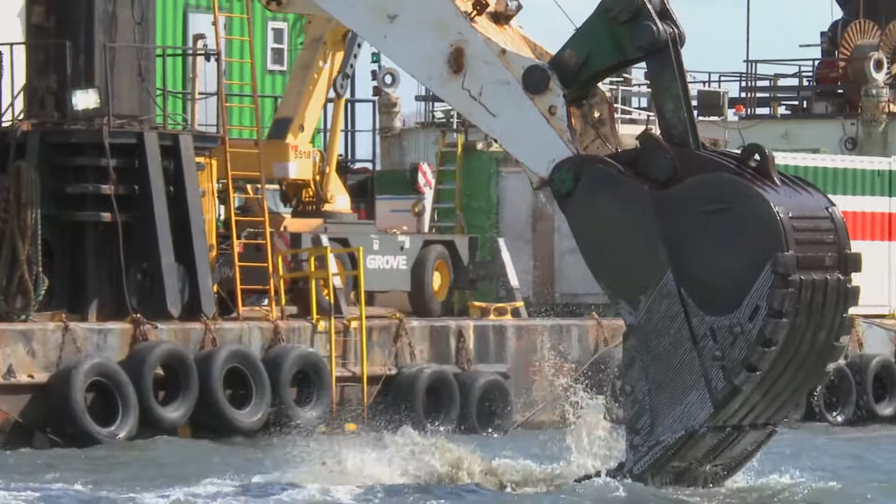On Sunday, March 3rd, 2013, at 3:30 p.m., South Essex Sewerage District Director Alan Taubert gets a phone call that no one wants to receive. I got a phone call from Amy McHugh, Superintendent of Water and Sewer in Marblehead, who told me that there were seagulls in the harbor hanging around in one particular spot. I knew immediately that there was something seriously wrong out in the harbor that day.

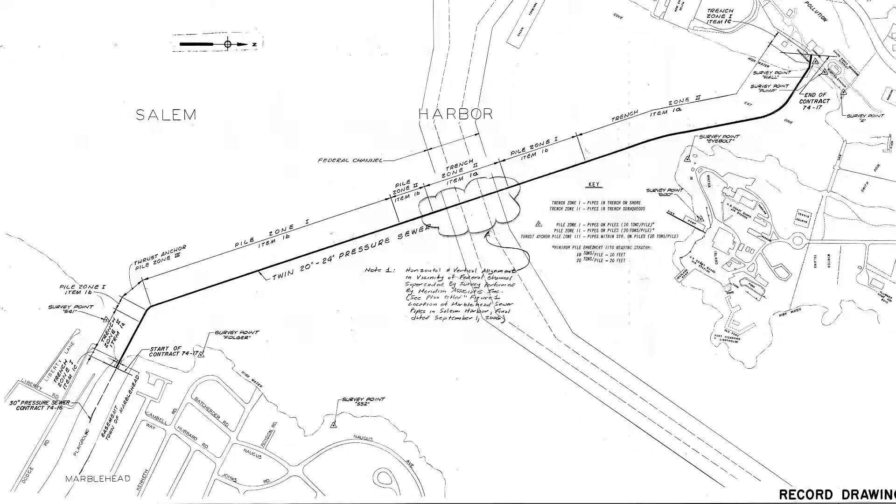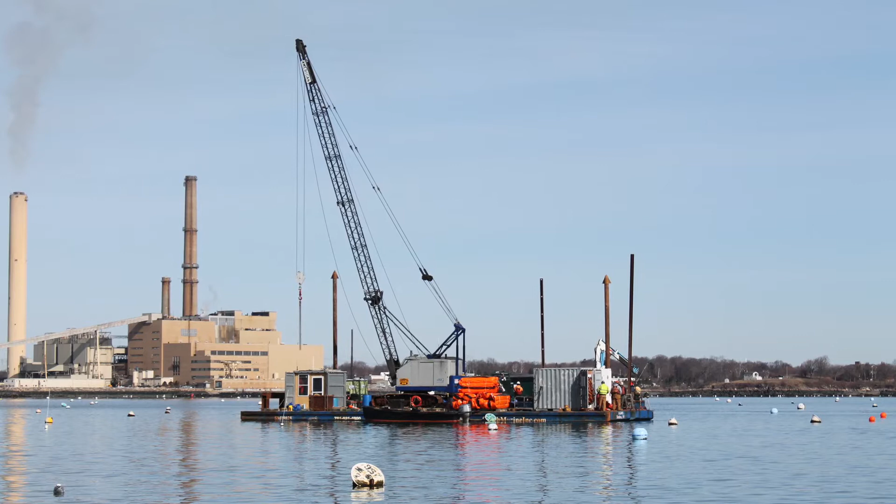The district suspected a leak in one of the twin pipes that delivered sewage from the Town of Marblehead to the South Essex Sewerage District for treatment. Unfortunately, this belief was correct. Divers from J.F. White Contracting found a broken section of pipe a few hundred feet off the Marblehead shore and performed an emergency repair using pipe the district had on hand for this purpose.

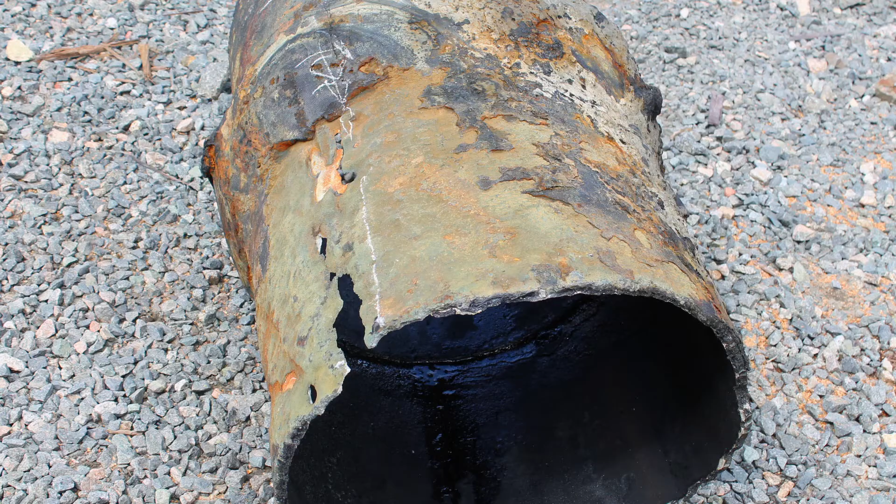This is a section of the pipe that came out where the original leak was found, right here. So when we excavated down the first day, this is where the hole was. But this is the piece of pipe that came out that was replaced. Realizing the magnitude of the threat that further leaks could develop, the sewerage district acted immediately to hire a design team to thoroughly evaluate the pipeline. This confirmed that the pipes were in urgent need of replacement.

I'm Rachel Burkhart, and I'm the project manager with Parsons Brinckerhoff, and we were brought on board by the district here after they discovered the leak that was on the Marblehead end of the force mains that go from Marblehead over to Salem, to assess whether or not that leak was unique to that section of the pipe or what was the condition of the rest of the pipe.

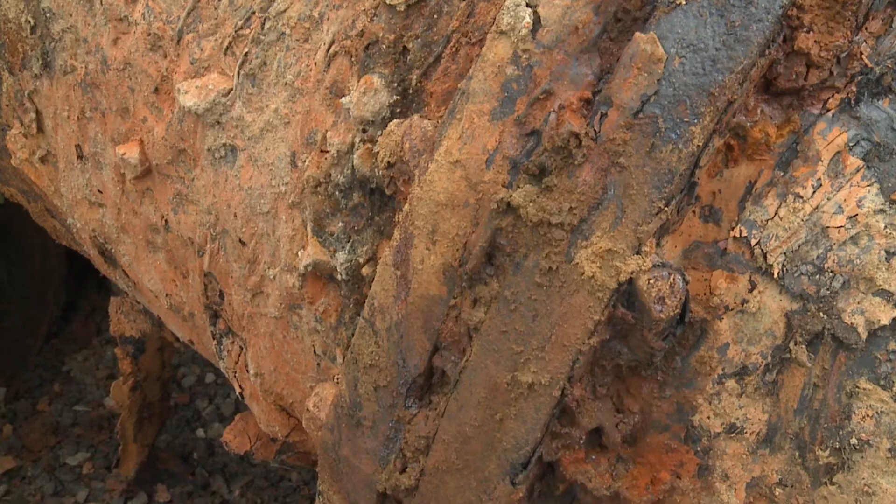So our early work was to send in divers and find out what the condition was, do some non-destructive testing, and the conclusions of that phase were that the pipe indeed was corroded severely in several locations, and that particular leak could happen at any point in time on other parts of the pipeline. So our recommendation after that point was to replace the entire pipeline from one shore to the other.

As well as contending with the modern-day boating and recreational activities, working in this historic harbor presented special challenges. Native Americans used this location as a place for hunting and fishing, and state officials and local tribes believed it might be possible to find evidence of their ancestors' habitation in soils buried deep in the sediment below the harbor floor.

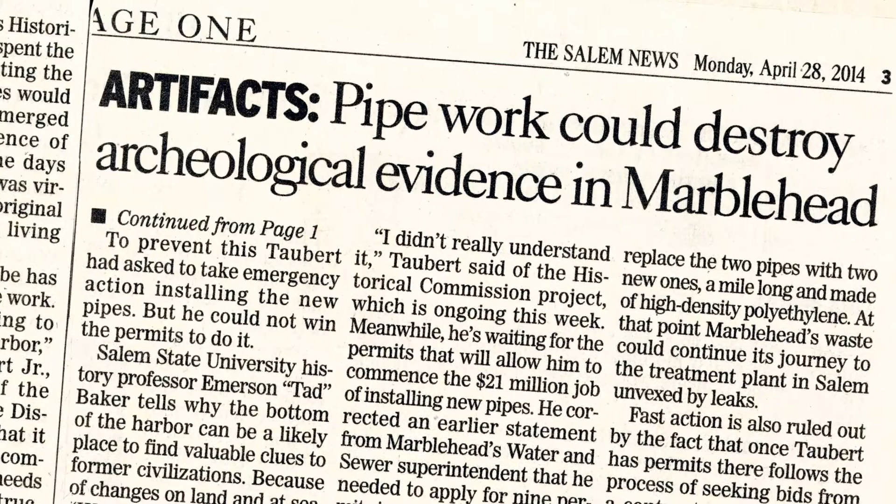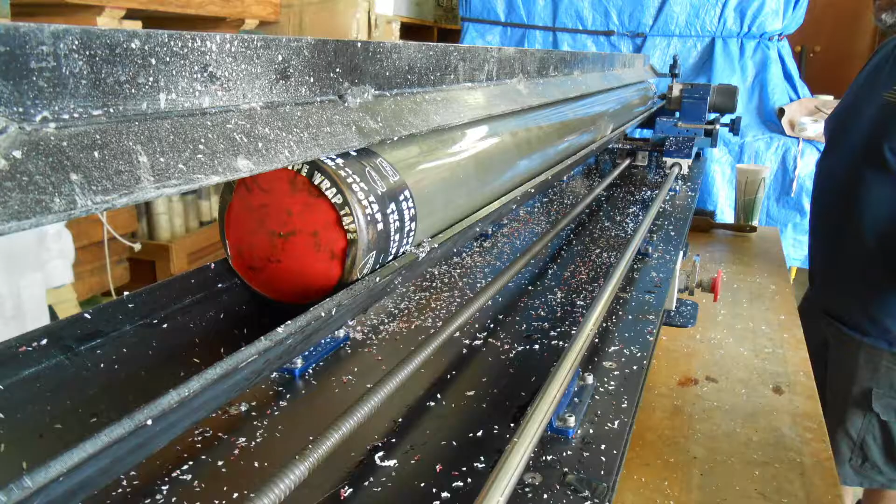To address these concerns, the design team used a VibraCore sampler to collect a series of deep sediment samples. We had to do a series of VibraCores and then take those samples down to a laboratory at the University of Rhode Island, where an underwater archaeologist and his team examined them in great detail and analyzed whether or not they would have any findings. So we ended up doing 2 rounds of that.

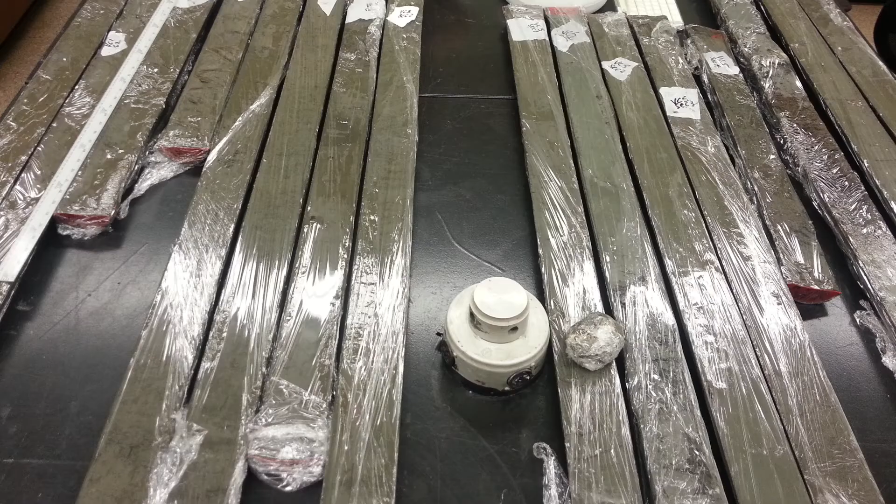The first round was just along the length of it to see if we saw anything of interest, and then we found one where there might have been some potential paleosols, which was in a layer where it was a salt marsh that existed 7,000 years ago. It now is about 10-20 feet into the muck, but that's where the sea levels were at that particular time.

Eventually, after a long, lengthy process, because this was only one of about 5 permits we needed to get, we finally got the permits and got into the construction phase of the project. With project permits and approvals in hand, the district was able to proceed with the bidding of a construction contract to install new pipelines beneath the harbor. At an initial contract value of $9.4 million, contractor Caldwell Marine mobilized into Salem, Massachusetts in mid-January 2015.

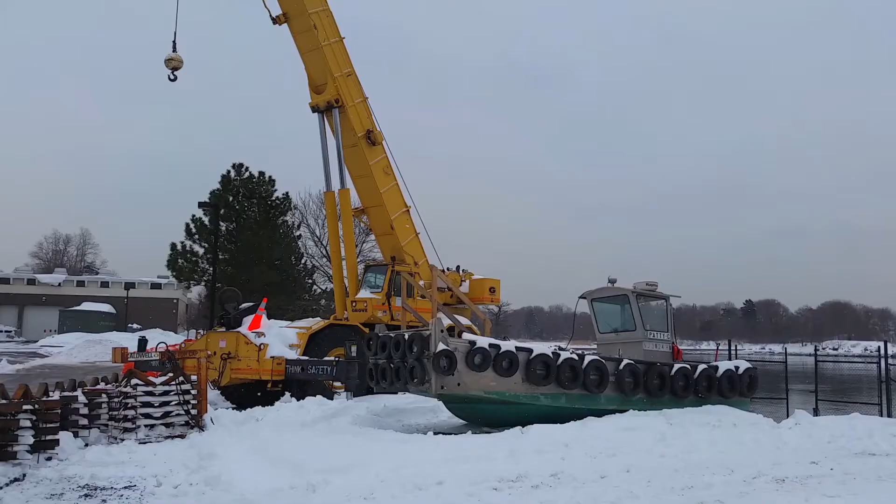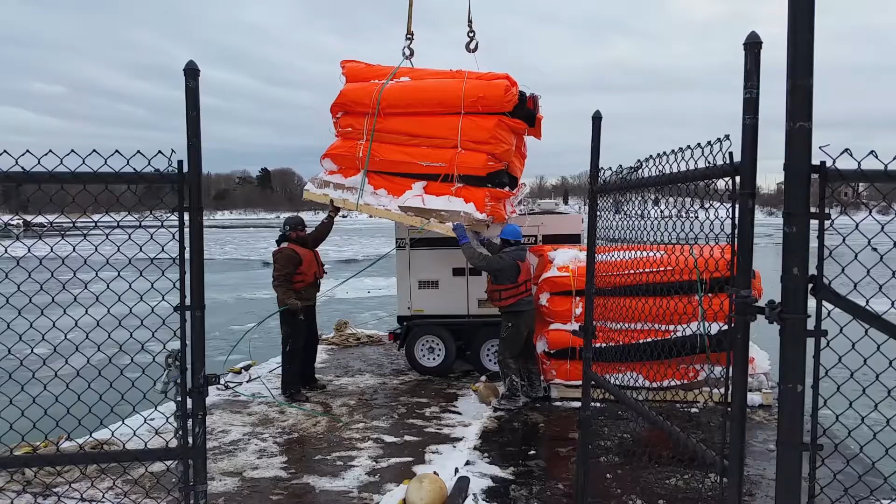As the contractor made initial site preparations, winter geared up for a record-breaking season, officially making the winter of 2014-2015 the all-time snowiest in the Boston area. Even with all the snow, Caldwell continued to assemble their equipment and materials while they maneuvered workboats and barges into Salem Harbor.

Because sanitary waste is continuously being flushed and drained into Marblehead's sewer system, there was no effective way to stop the flow during construction of the new pipeline. For this reason, the pipeline construction was carefully phased to ensure that sanitary sewage could continue to flow from Marblehead to the South Essex Sewerage District's treatment plant without any loss of service.

During the first phase, the pipelines were installed across the Federal Navigation Channel, the deepest part of the harbor. Special flanges were fabricated at each end to allow for future phases of the pipeline to be bolted on.

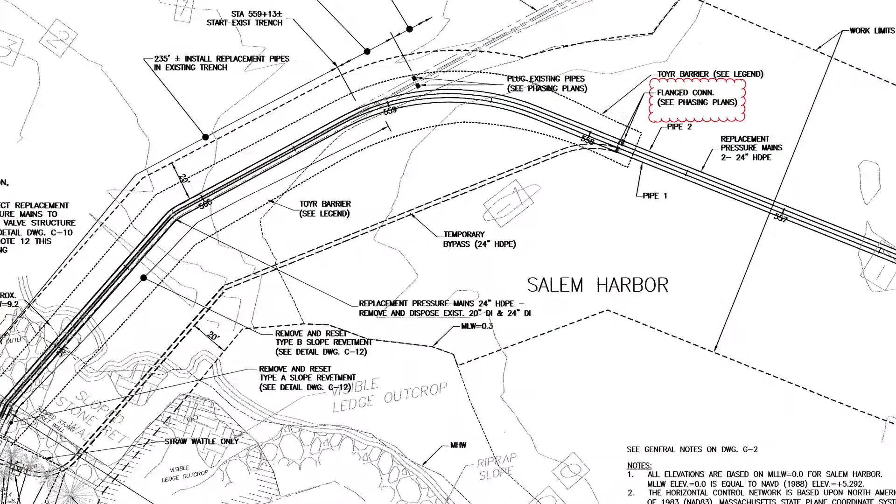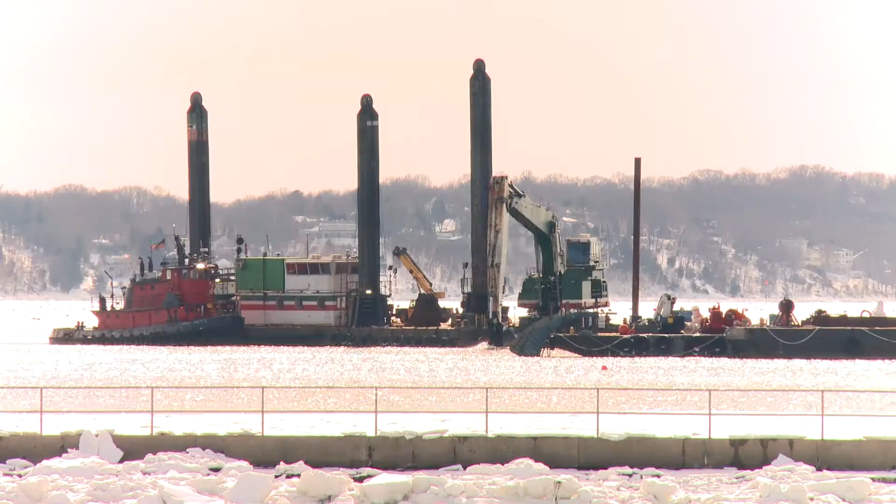This phase required a trench to be dug to place the new pipes, while the old pipes remained in service, carrying wastewater out of the town of Marblehead. In order to accomplish that goal, Caldwell Marine subcontracted with J. Cashman Incorporated, which brought in the Captain A.J. Fournier excavator dredge barge. This dredge barge excavated the majority of the trench through the winter and spring.

The trench was located parallel to the existing pipelines, but far enough from them to avoid the risk of damage. When the trench was complete, the new pipes were installed, at a depth great enough to provide a minimum of 5 to 6 feet of cover over the top of the pipes. The trenching and offshore pipe installation were the pivotal first steps to prepare for all future phases of the job.

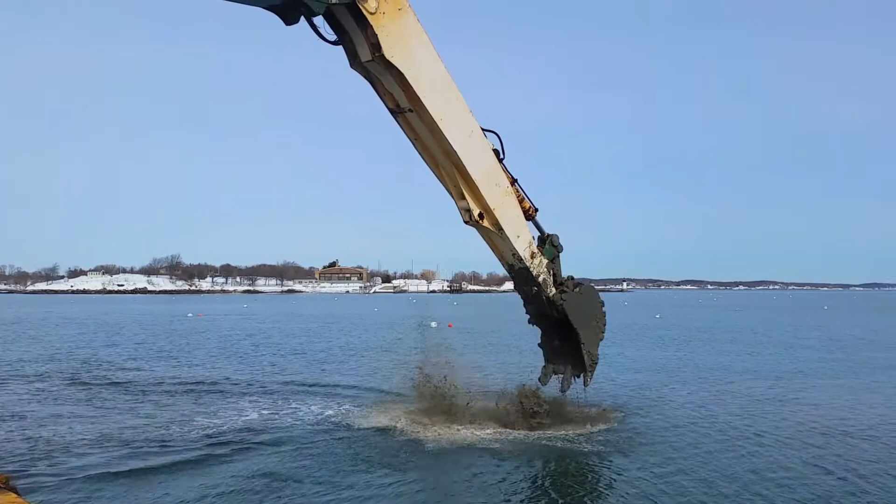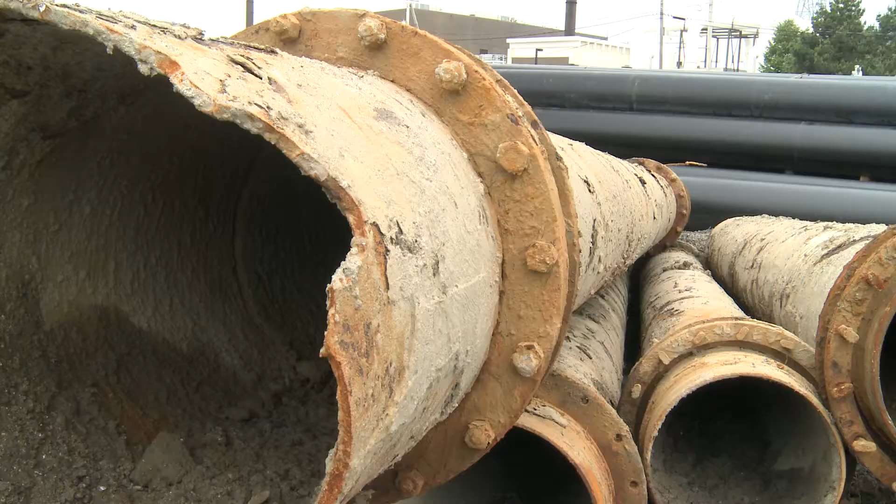The existing ductile iron pipelines were installed in the mid-1970s as part of the 74-17 Marblehead Force Main and Pressure Sewer project. With these pipes failing in less than 40 years, the district and design team worked to select new materials that would provide superior long-term performance. This piece here is a section of the new pipe that just got installed. This is a high-density polyethylene SDR11. It's basically a garbage bag. This is 2 inches thick.

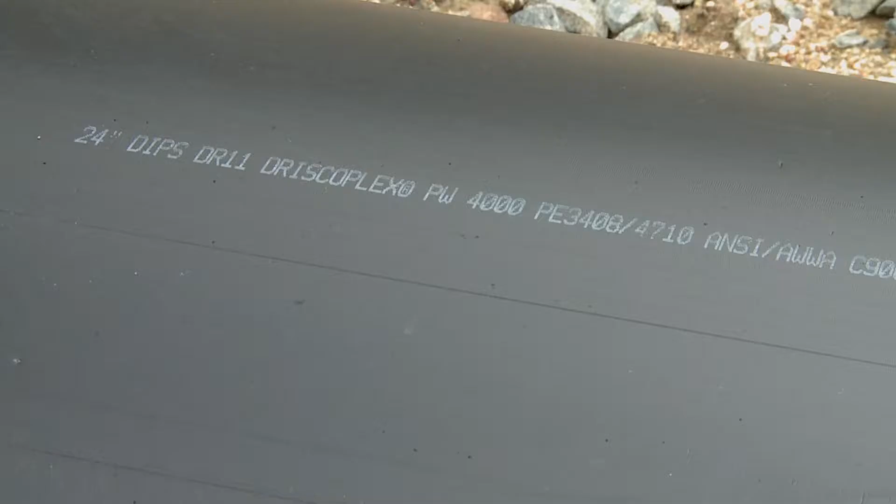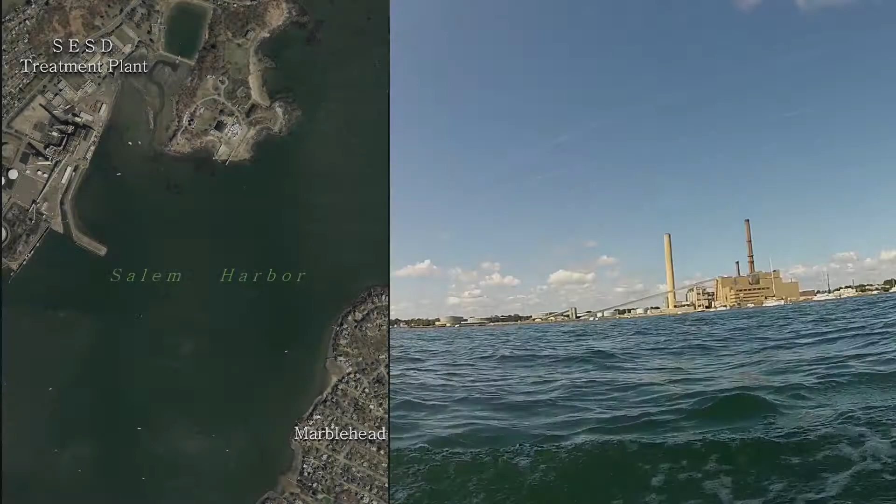Using the HDPE pipe material, along with bolts and flange backing rings made of C276 Hastelloy steel, one of the most corrosion-resistant alloys available, the design team hopes to achieve the goal of providing a 100-year service life. Raw sewage from the town of Marblehead travels over 6,000 feet to the treatment plant in Salem. To create pipelines of this length, a pipeline assembly area was established on the Salem side of the job.

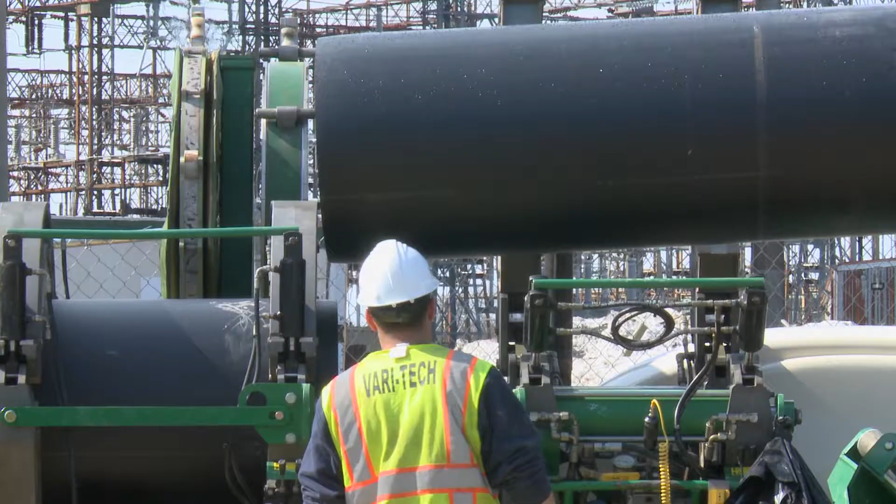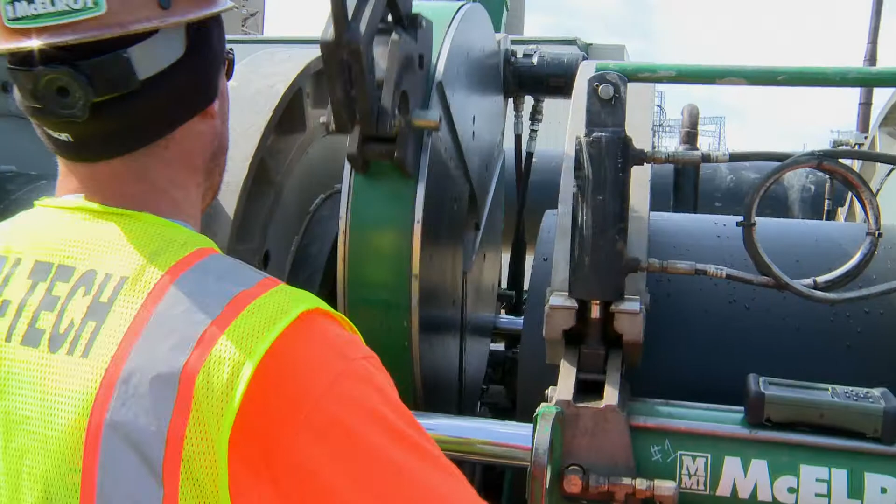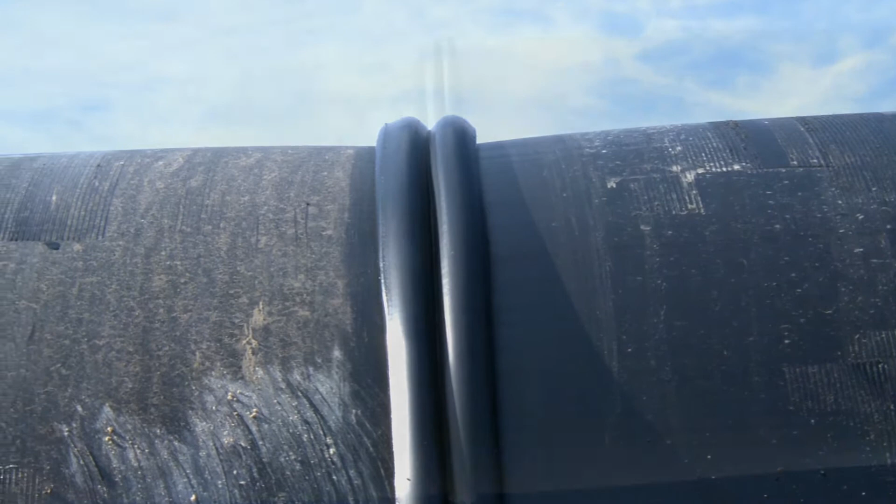Sections of the new pipe are fused together using 2 McElroy fusion welding machines. These machines plane the pipe ends to ensure a square fit. A plate then applies heat at 400 degrees Fahrenheit for around 15 minutes. When ready, the machine presses the 2 pipes together, applying 425 pounds per square inch of force. Once the proper weld bead is formed, the pipe is allowed to cool for 30 minutes. This creates a fused joint that is stronger than the pipe itself.

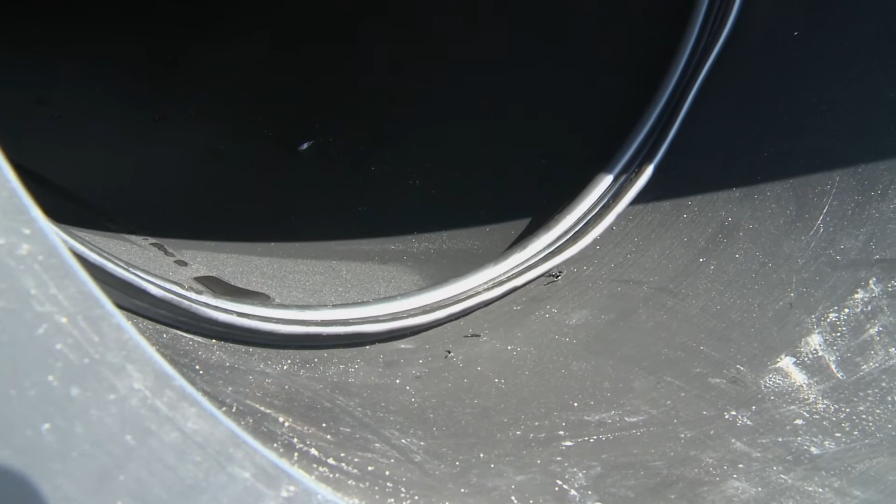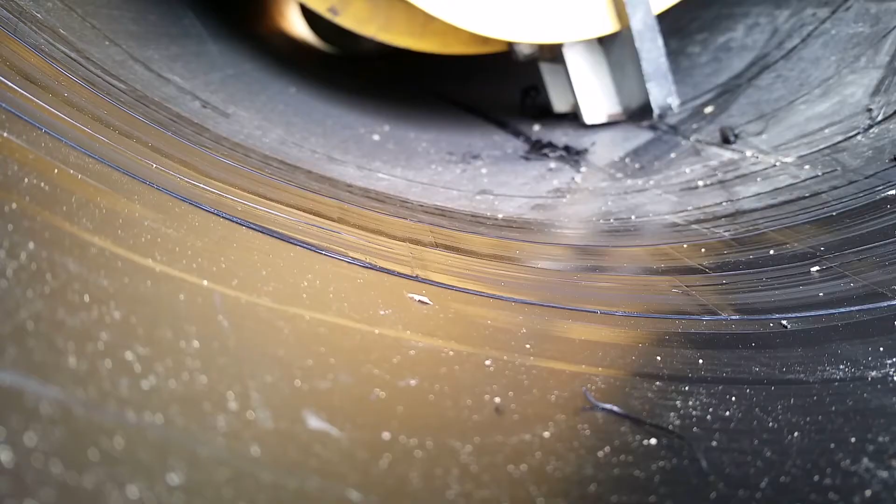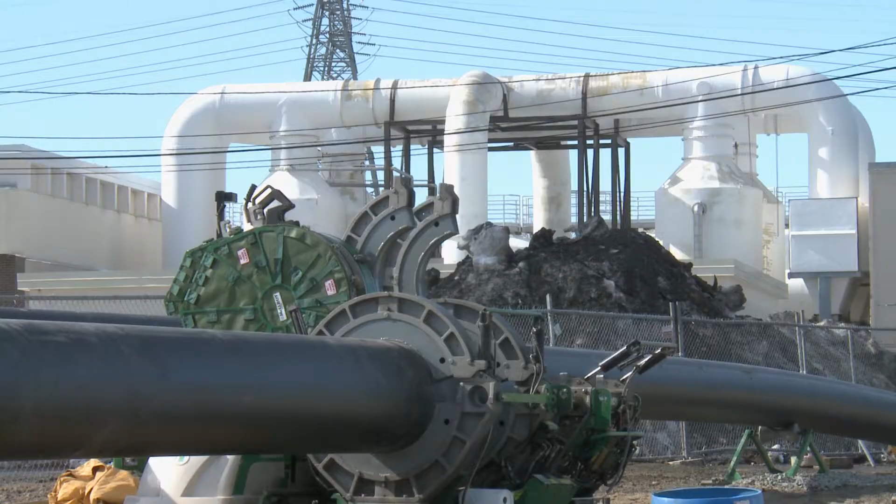On the inside of the pipe, the raised bead could cause drag or become a potential area for debris buildup. To create a smooth interior at the joint, the bead was removed from the pipe interior using a specialized cutter head. Technicians had to time the removal process precisely to ensure the fused joint cooled to an optimum temperature. Too hot, and the tool would dig too deep. Too cool, and the bead would be too difficult to remove. Over the course of building 2 6,000-plus foot-long pipelines, this fusing and debeading process was repeated over 250 times.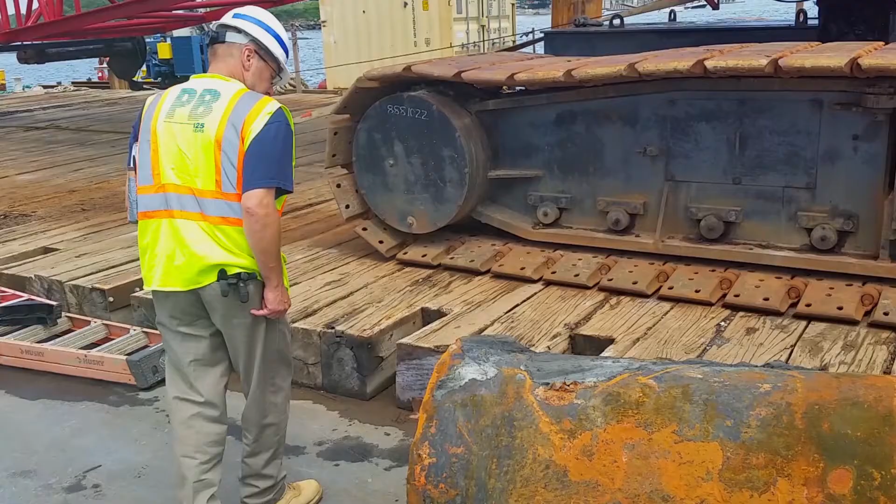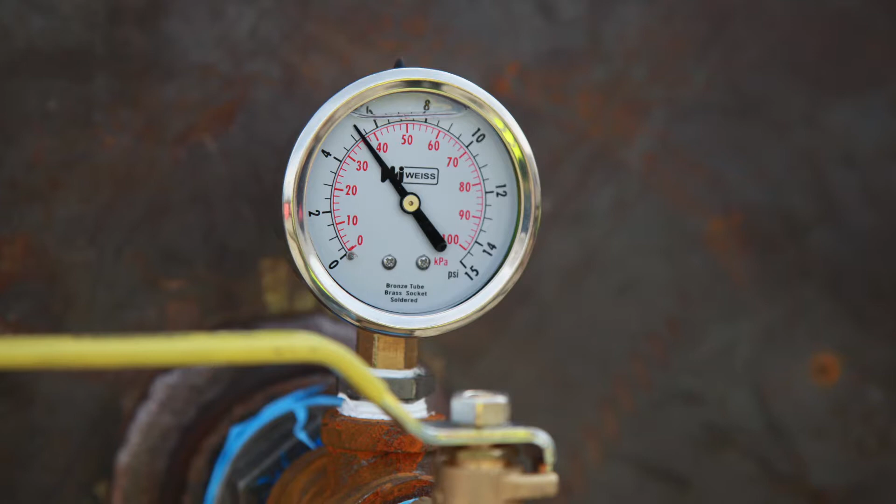Strings of pipe 500 feet long were pre-assembled on land and fitted with caps that allowed the pipelines to be pressure tested 1 section at a time. My name is Scott Williamson. I'm with Parsons Brinckerhoff Engineers, and I'm the resident engineer on the project for the district. Well, marine construction is, as you'd guess, all underwater. So we put testing programs in place. We water test, we air test, we make sure the pipe is all assembled with tight joints.

There's about a mile of it underneath the harbor. Actually 2 miles when you consider that there's 2 pipes, so each of those pipes get tested. This is what we do to just confirm that the pipe will hold pressure and hopefully last 100 years.

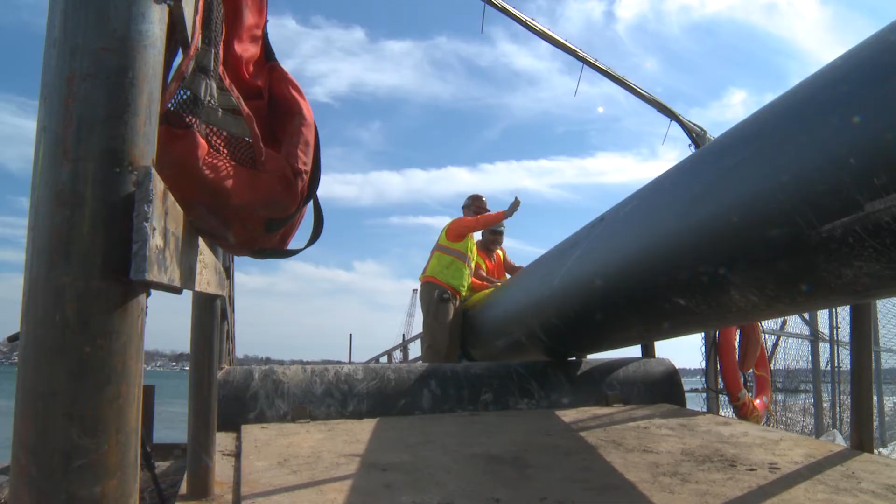Let's get it this way as far as we can, and then we'll move the machine like this. Try to shoot it over this way more. Let's try to get in here as far as we can.

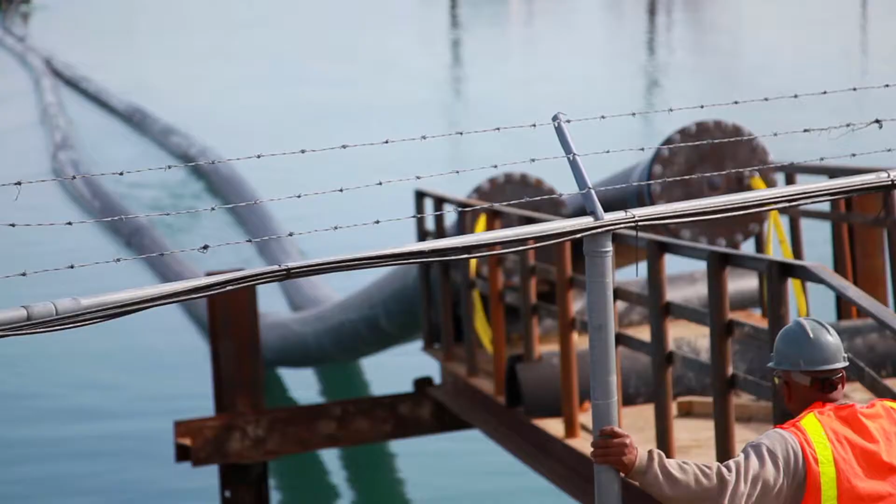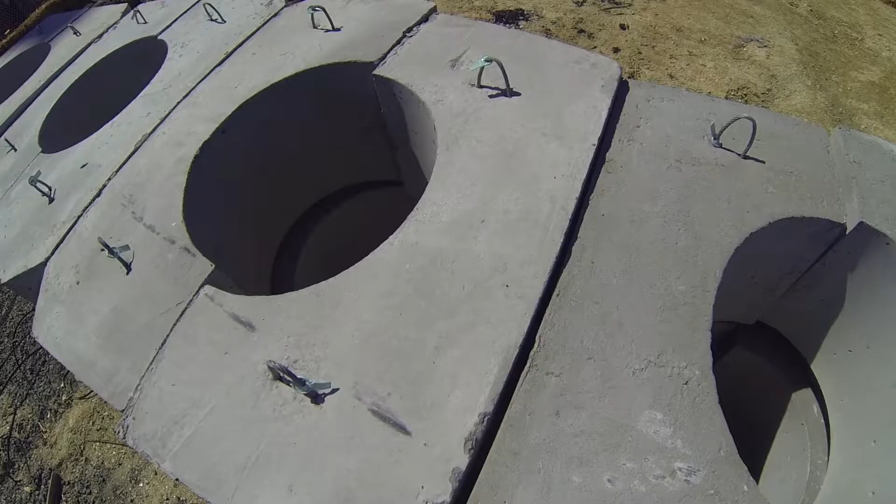The 500-foot strings were then floated to the barge, where they were fused together into longer strands. Pipeline installation utilized a float and sink technique to install the pipes. To offset the buoyancy of the pipe, specially shaped ballast blocks or collars, each weighing close to 7,000 pounds, were precast out of concrete to cradle the twin pipes.

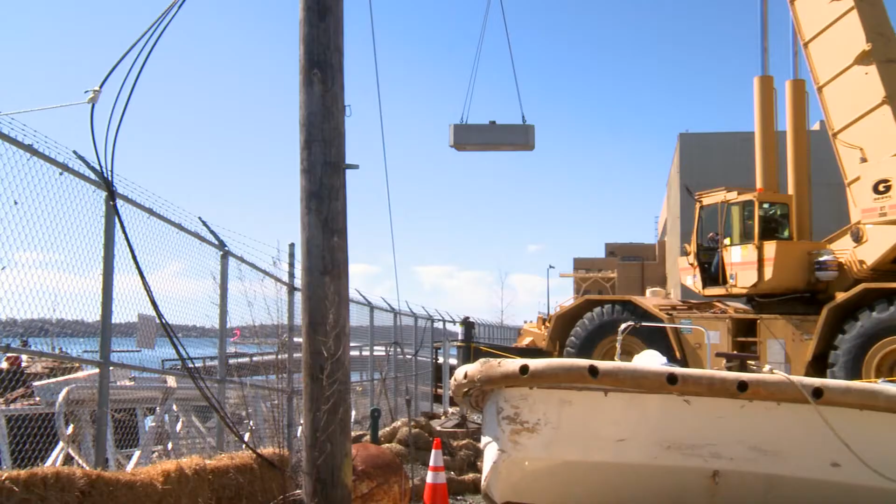To provide the required ballast and sink the pipes into the trench, these blocks needed to be attached to the pipes every 15 feet. Over the length of the alignment, the ballast blocks weighed in at over 3 million pounds. A unique numbered nameplate, machined from galvanized steel, was anchored to each one of the blocks. During future inspections, these number plates will give divers a tactile means to positively identify a block, even in the murky harbor floor.

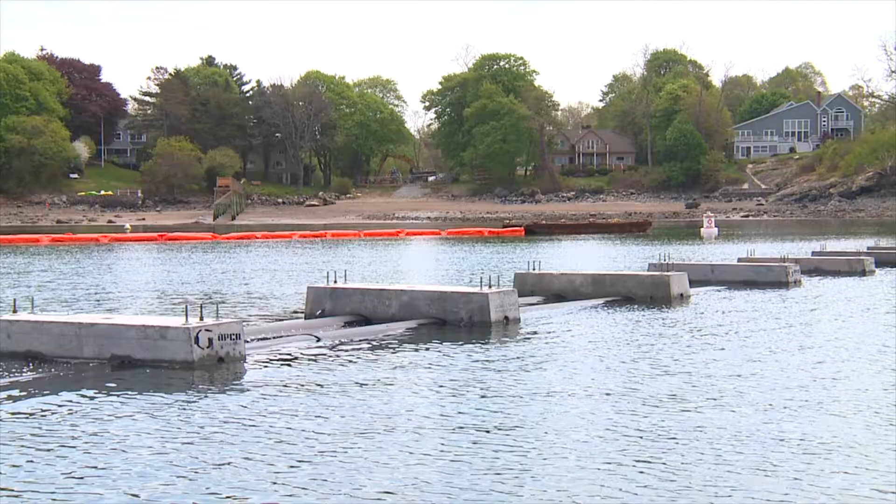Once completed, the finished pipeline assemblies were floated into place above the excavated trench. Even with the ballast blocks assembled onto the pipeline, the empty pipes were buoyant enough to float. Working from a lay barge, one of the pipes was filled with water at a controlled rate to allow the pipeline to sink gradually into the excavated trench. Divers monitored the sinking of the pipes to verify that they rested properly at the bottom of the trench.

I'm Brett Bryant, Caldwell Marine, and I'm the diving superintendent. When we were sinking, you're sinking both pipes at the same time, so our engineer Patrick Lynch had a valve set up so he could make sure as the pipes sank, both of them were going down at the same time rather than one flipping like this or the opposite direction.

Usually it was never out of level more than a foot or two. The only way the diver could tell is when he was on the bottom. When the blocks are setting down, he'd see one side hit before the other side.

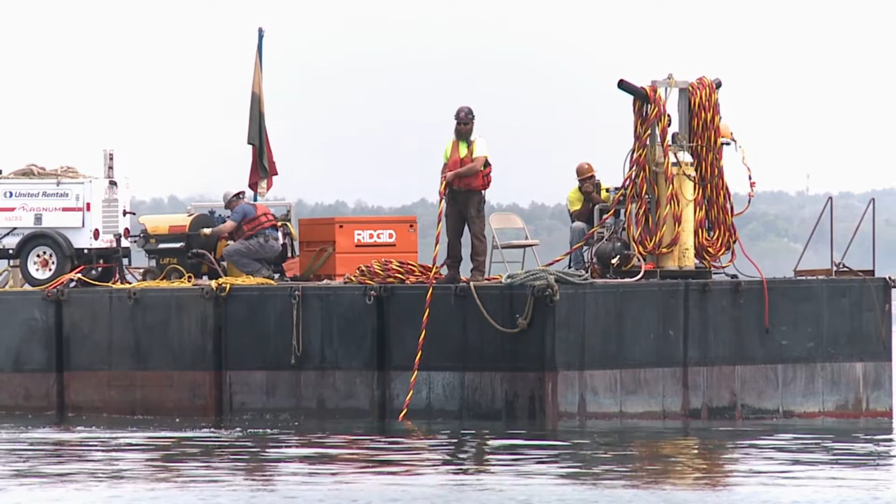We got one guy on the radio and a couple guys tending, one guy in the water, and the guy communicating to the diver back and forth. He's basically talking to the diver, and then myself or Eddie Mendler, somebody would always communicate with the tugboat.

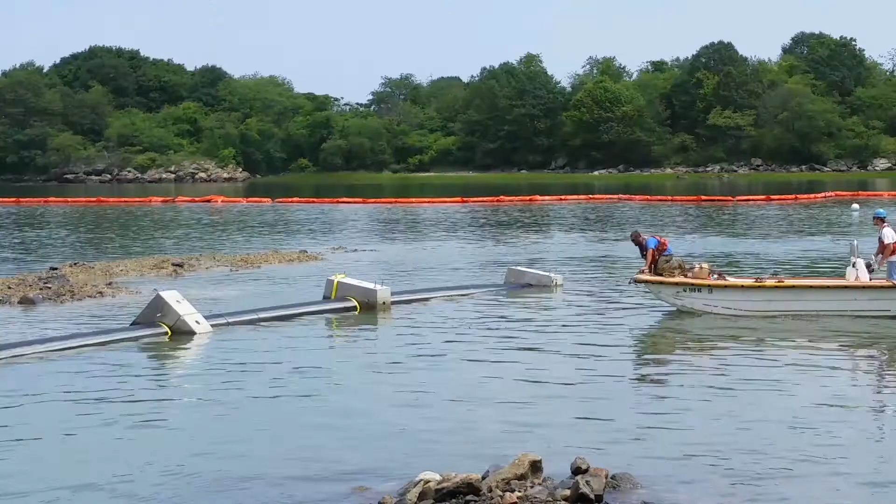On the other boats, we had various boats along the line, pushing the pipe to where it needed to go, and the diver would say, need to slack it to the east or push it to the west, depending on what side the boats were on and what position we were actually sinking the pipe.

I'm Patrick Lynch. I'm the project engineer for Caldwell Marine. I do a lot of the engineering duties, so once we actually install the pipe, I create all the drawings to send to the client. I also oversee a lot of the field work that's been going on.

So this is actually showing the blocks coming out of the portion that was in the channel that was previously backfilled and coming into the new trench. So you can see the trench here on both sides. This is the side slope of the Marblehead navigation channel, and each one of these here are the blocks we installed, and the pipe is obviously in between.

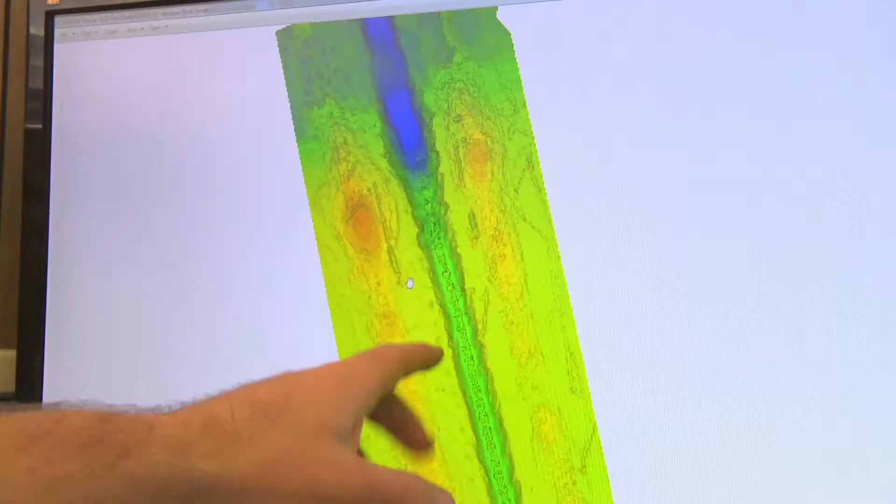When we dug this trench, we put all the material here, laid the pipe in. Now we're going to grab all the material from either side and put that back into the trench to cover up the pipe, which you can see here at the blocks.

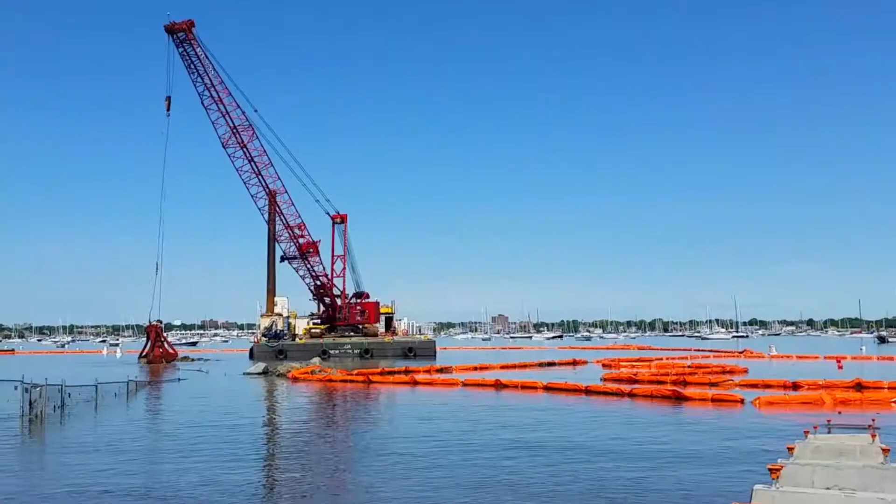So these surveys are also used to input into the HYPACK on the dredge on the crane, and then they know how much material is in each location, so they'll know where each one of their buckets is, and they'll take all this material and put that back in. Then that's how we know that we're getting back to grade.

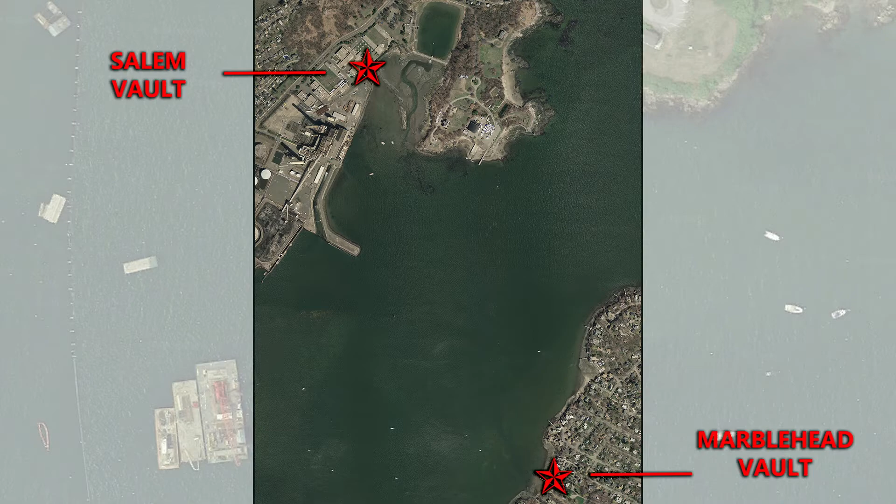Once the pipes were installed through the offshore region, a temporary bypass pipeline was connected across the inshore sections and connected to one of the existing pipes on the Marblehead and Salem shores. This allowed the district to transfer flow out of the old pipes and into one of the new pipes.

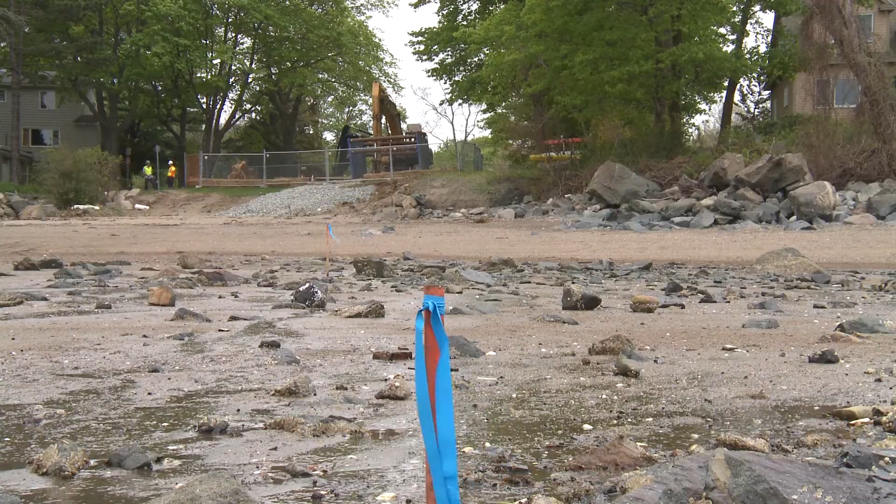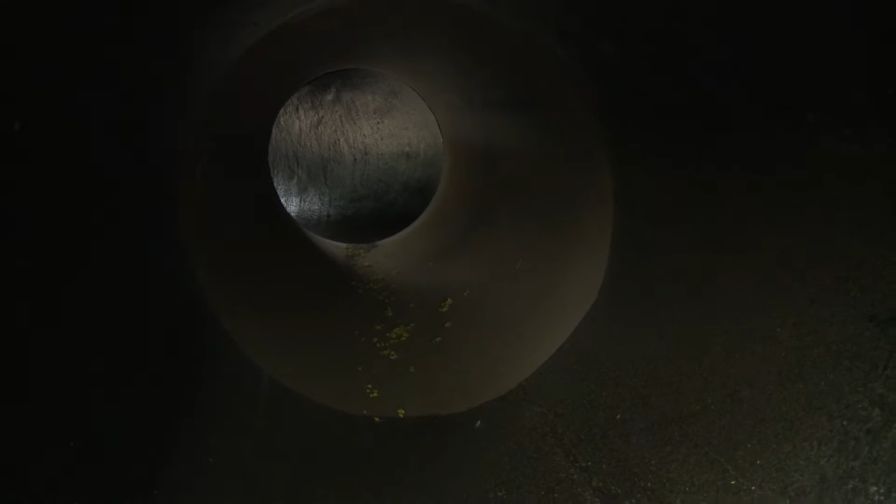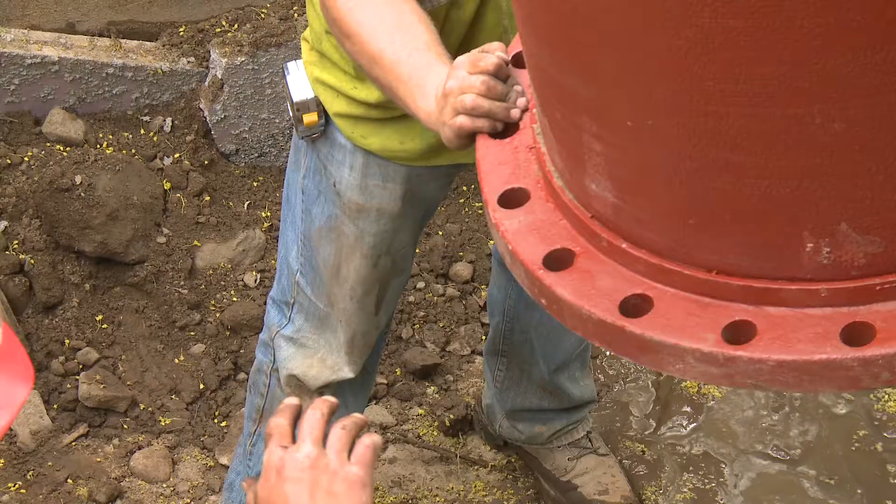To divert flow on the Marblehead side, a specialized tap and line stop were installed onto the existing 30-inch sewer. Just like that. Stay right there. Down a touch. Down a little bit? Yep, there you go.

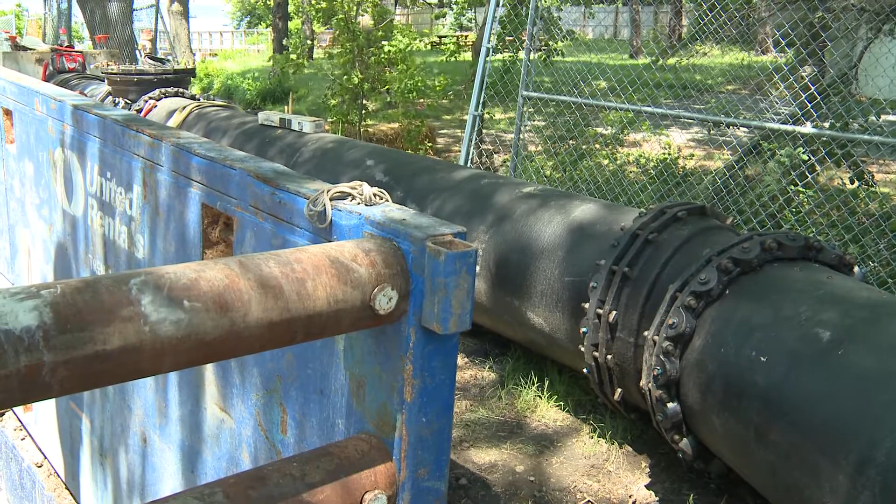Ductile iron pipes and fittings and a mechanical joint were then used to make up a temporary bypass connection to one of the newly installed 24-inch HDPE pipes. Similar work was required on the Salem side of the job. Temporary ductile iron pipes were connected to HDPE pipe.

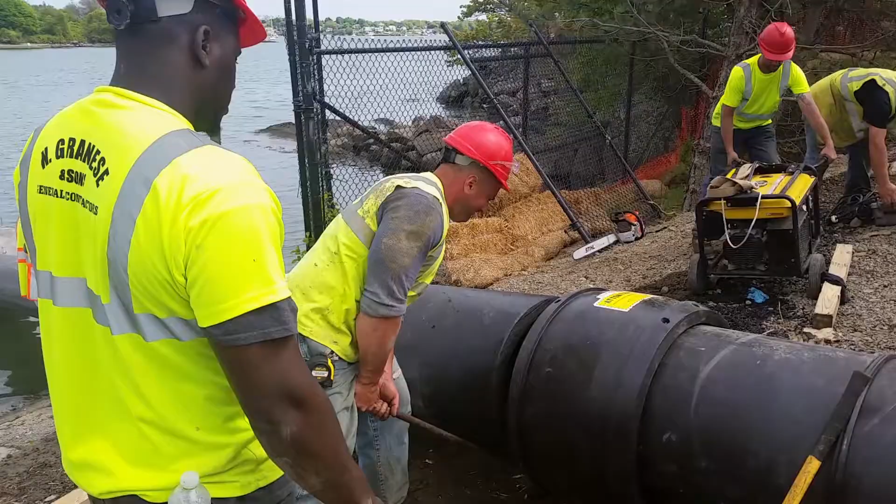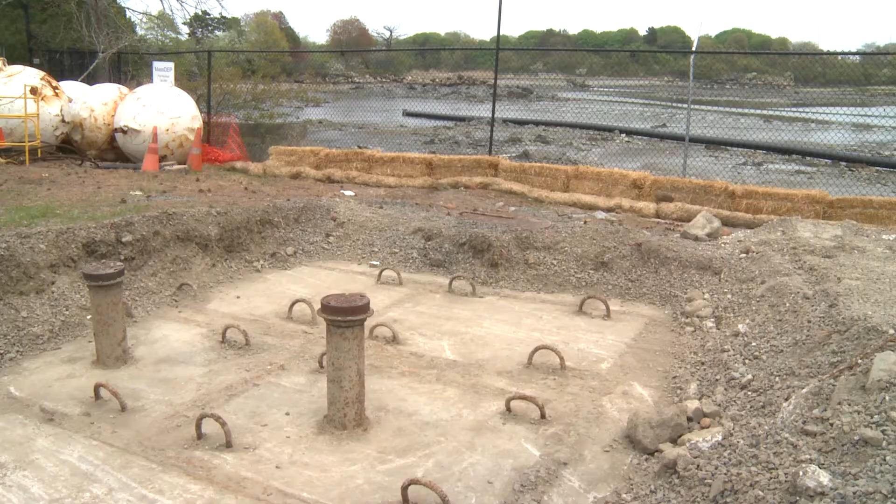Construction crews installed a specialized electrofusion coupling to join two HDPE pipe segments. A temporary meter was installed to track flow. With the bypass in place and ready for operation, crews carefully coordinated valve operations to allow wastewater to flow into the new bypass pipe and to shut off flow to the old pipeline.

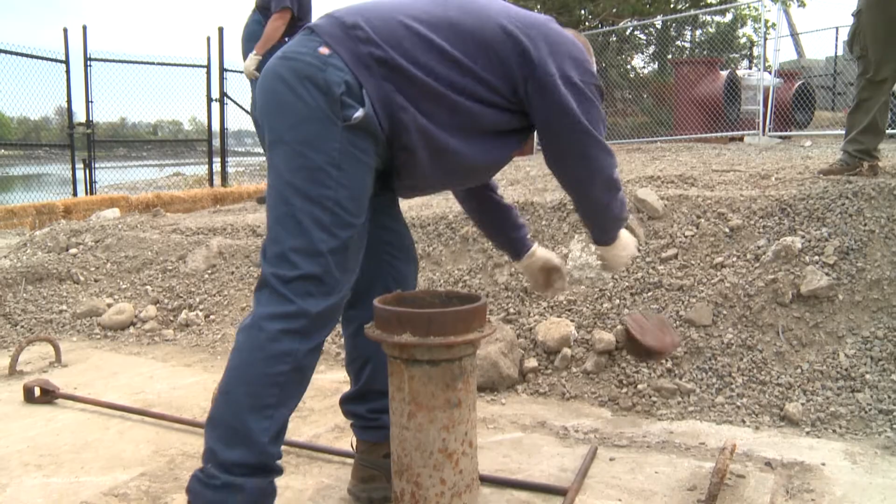Go ahead, are you standing there? What do you got? We are here, and we're pretty much ready to get going. Okay, we'll close ours first, huh? Correct? Yep. You can start, because it'll just divert. We'll start slow. Yeah, the flow will just eventually divert over to the 24 anyway.

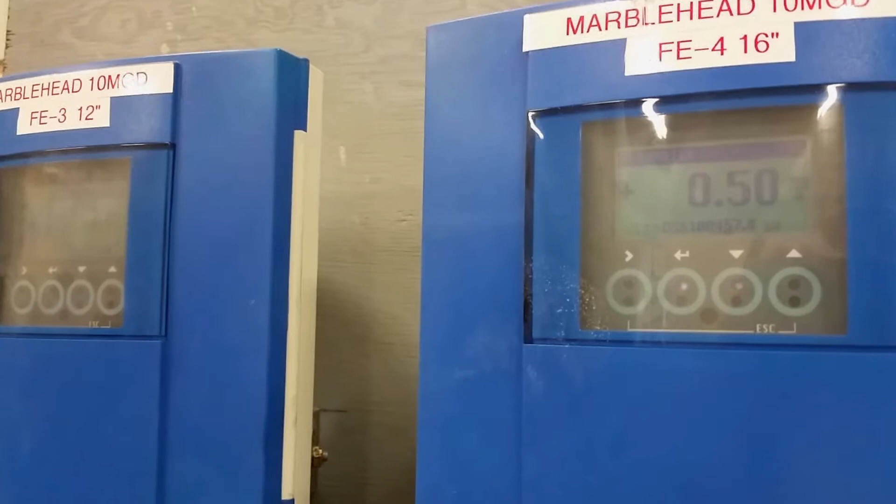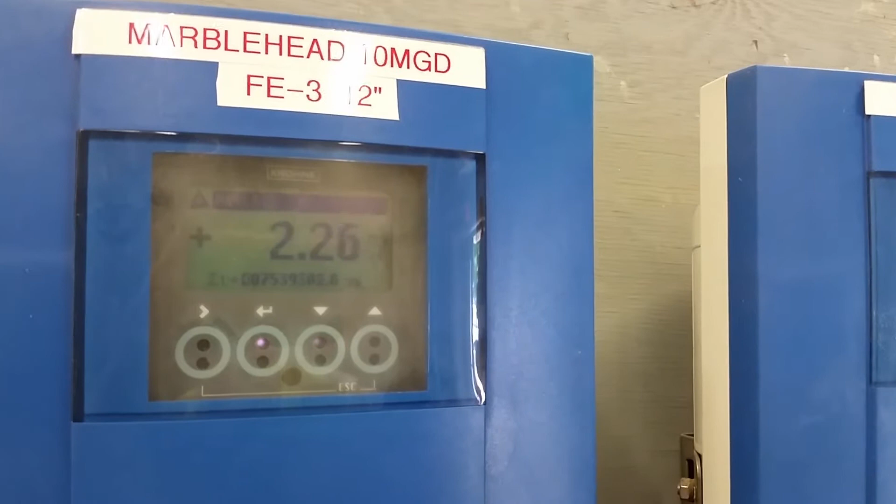With flow safely transferred out of the old pipe, crews began making necessary modifications to accept the new HDPE pipe, as well as rebuilding components of the vaults located on the Marblehead and Salem shores. Crews could now expose the old ductile iron pipes and begin removing sections to make way for the new HDPE pipes.

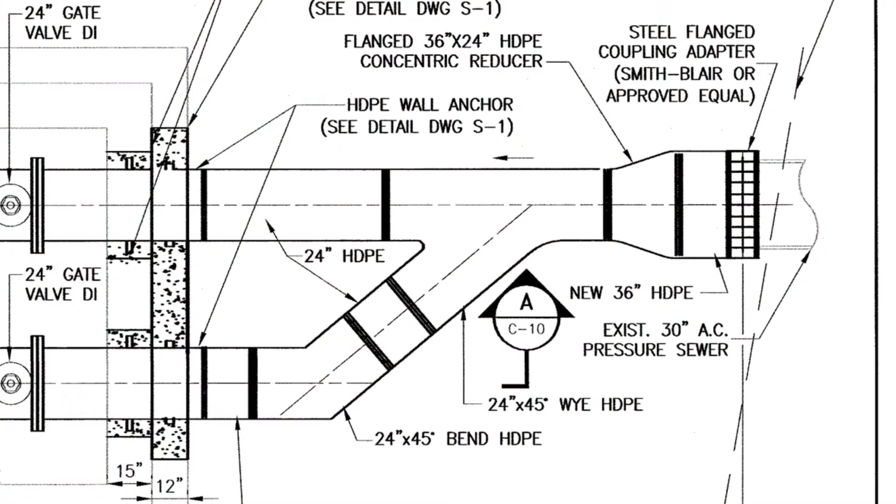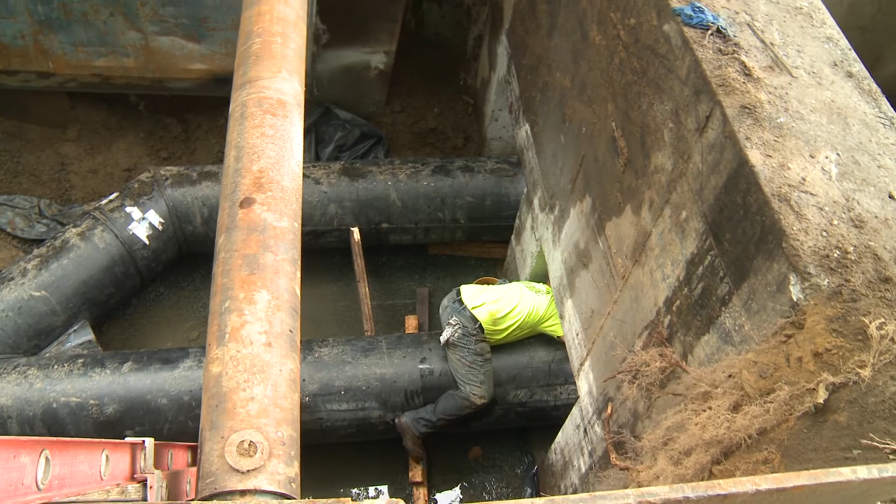New HDPE pipelines were connected to the existing 30-inch asbestos cement pipe using a specialized coupling and custom fabricated HDPE Y fitting to split the flow into the twin pipes that enter the harbor. Modifications to the Marblehead vault included the installation of new gate valves to isolate and direct flow.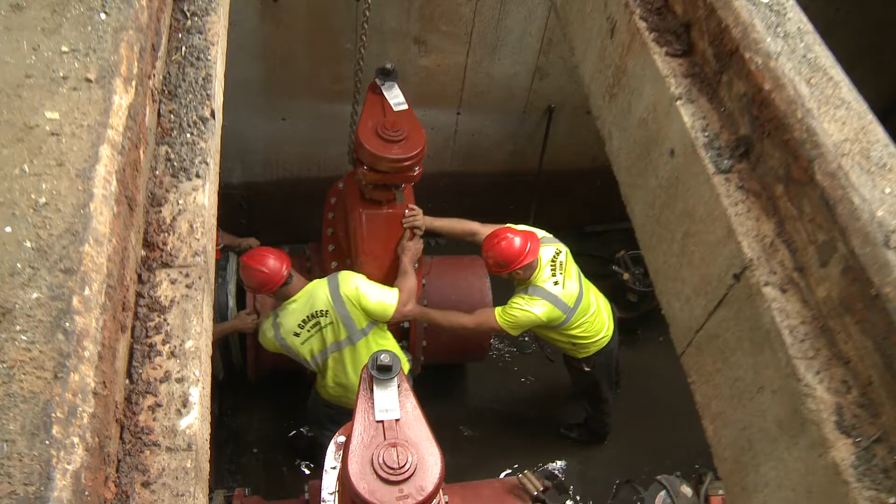Valve operation allows flow to be directed into either pipe under normal flow conditions, or to use both pipes in periods of high flow. The Salem vault also needed to be prepared to accept the new HDPE pipeline. Wall flanges were made up with new nuts and bolts.

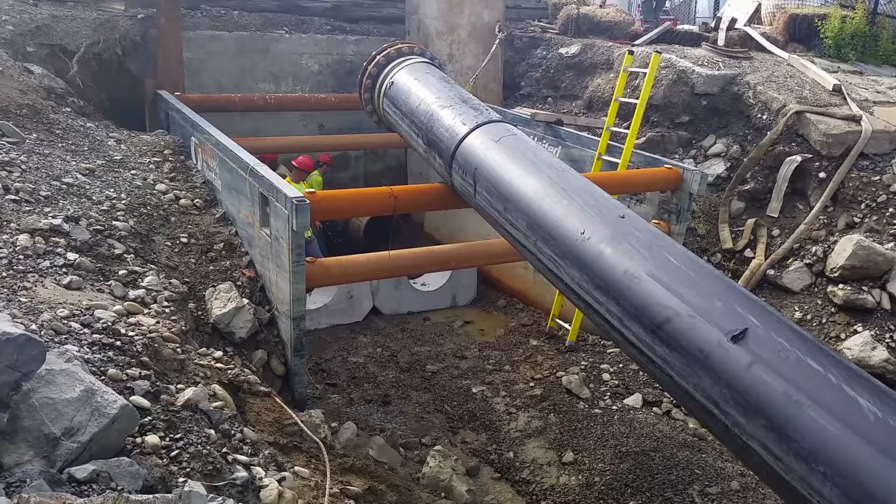Acceptable ductile iron spool pieces were reused and cut to length to make adapters to which the HDPE pipe would be connected. Exposed ductile iron components were surface treated with a bituminous coating and sealed with a polypropylene wrap to minimize the potential for corrosion.

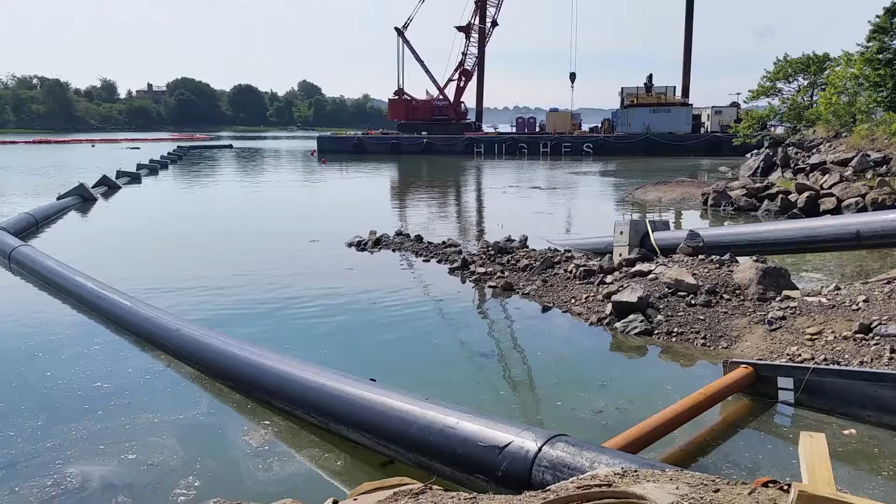Once the vault was prepared, HDPE pipes were floated above the near-shore trench where connections to the vault were waiting to mate up with the new pipeline. Once you get that little float set up, you'll swing over, pick up the offshore portion of the main line, bring it up onto the float. Reach over, grab this section we're going to add in.

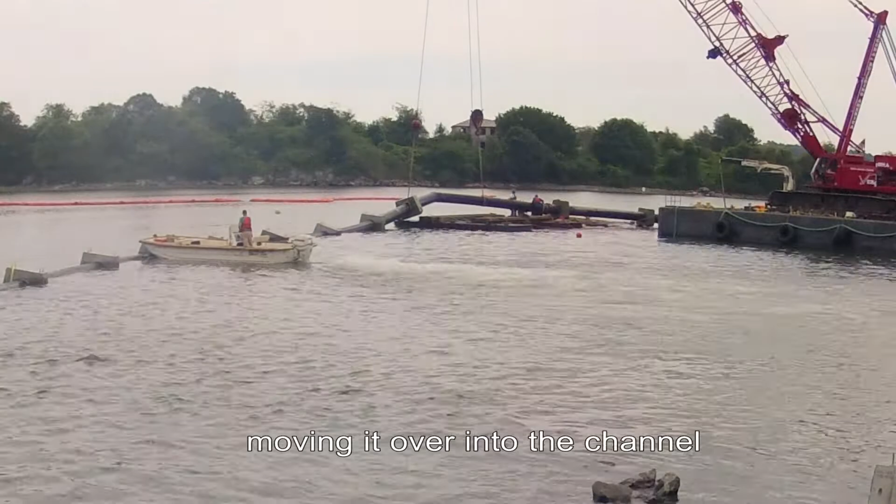Pop the hatches on them and start bolting them together, and then when they get it secured, we're going to start moving it over into the channel, and then we'll go to the other side and start flooding it, and the diver will put it in the channel.

The Salem vault received a new flow meter, which is used for tracking and billing purposes.

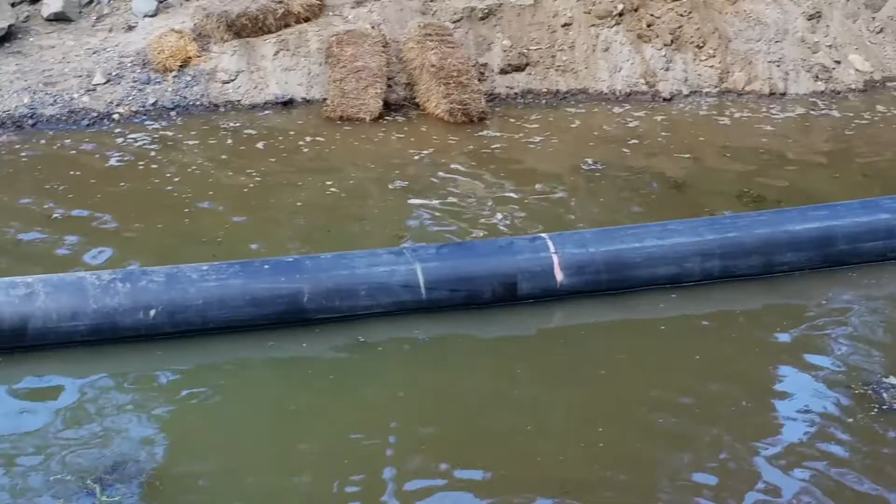As you got closer to the shores, though, the shore tie-in pieces we had to keep long. Obvious reasons, we were tying into a dead spot there. So we would usually make the pipe 75 to 80 feet longer than it needed to be. And we had a couple curves to go through, setting it down. So as we would go along and the pipe is sinking, the guys on the beach would have to cut it back.

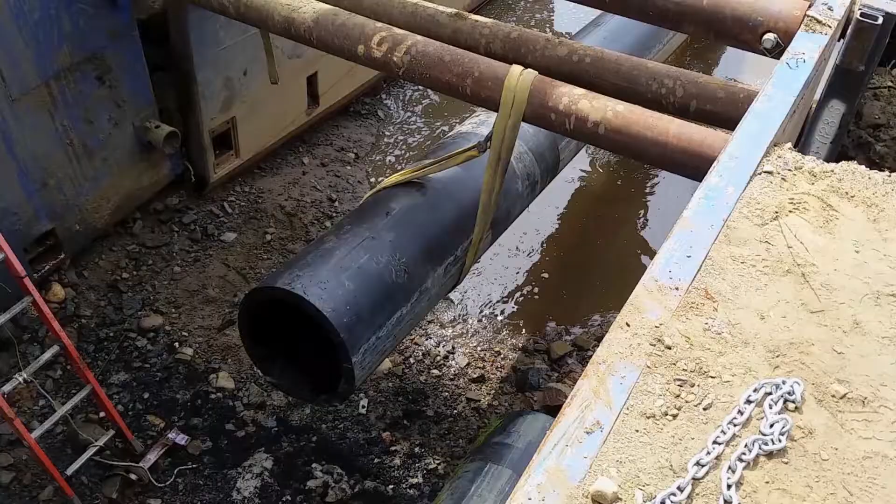And we didn't want to cut it back all at once because you don't want to cut yourself short once again. So we would cut 10 feet, 12 feet in the trench boxes, and as they would cut it, it would free it up so it could freely move forward, and as they're sinking it, we were able to maneuver it around as it went into the trench boxes.

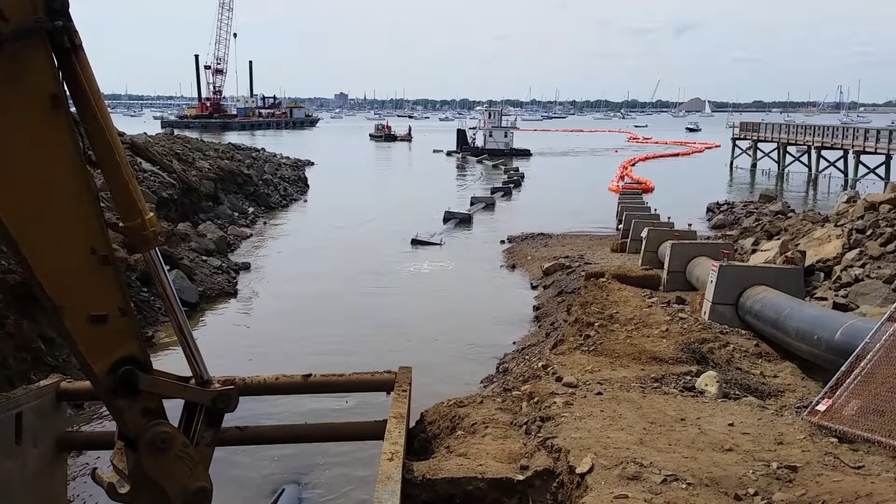Make sure that it's up on the side and start having Patrick sink as they come. Roger that.

Average day of sinking, whether we were near shore or offshore, was usually about a half a day of sinking. Because we weren't digging that day, as the tide ebbs and floods, we'd usually get some good visibility for the sink. The first block that hits the bottom is pretty much neutral. So the tugboat was able to, as stiff as the pipe is, push it, and that block would actually slide along on the bottom if you weren't quite in the trench. And the diver would go back and forth on the pipeline, so he could tell how much the blocks were sinking down into the mud.

When the diver's giving us information, it's going from the guy on the radio with the diver to the guys with the VHFs, and we're all on the same channel. So if I'm telling the tugboat to come to the east, the guy with the Carolina skiff gets the gist of what's going on. He generally didn't have to respond. He knew what was going to happen. And after we got the first sink out of the way, got the bugs worked out of it, pretty much everybody knew what was going to happen, and there was a whole lot less chatter on the radio.

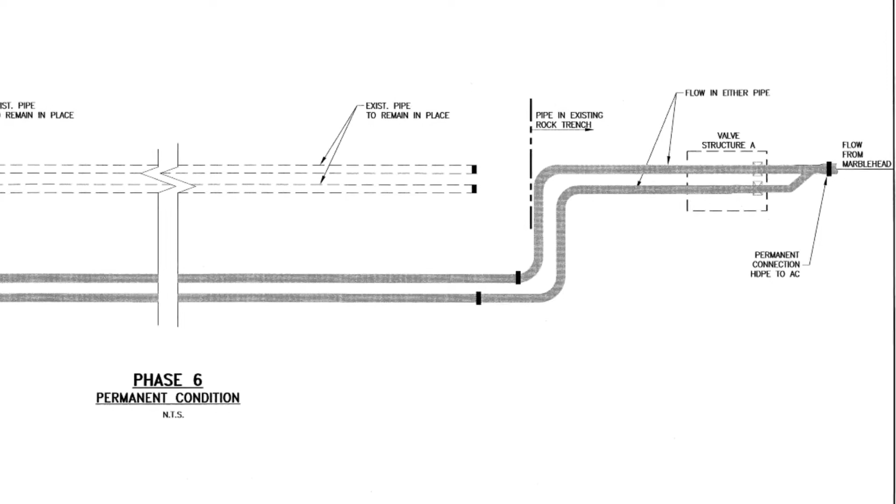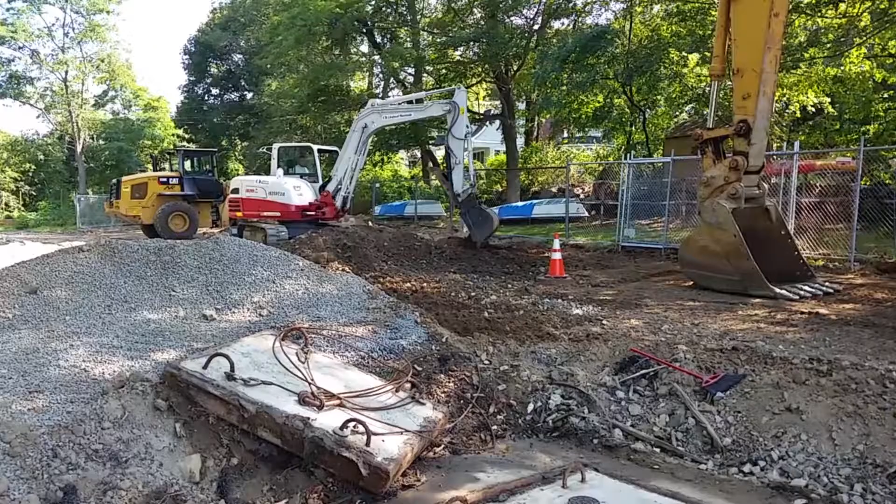Once the first permanent connection was readied, the bypass connection was closed, and flow from Marblehead began flowing through the new pipeline. The second pipe was connected shortly after Labor Day, completing the new sewer connection. To complete the project, what remained was to backfill the remaining sections of pipe trench, complete work on the Marblehead and Salem valve structures, and restore the shoreline on the Marblehead and Salem sides.

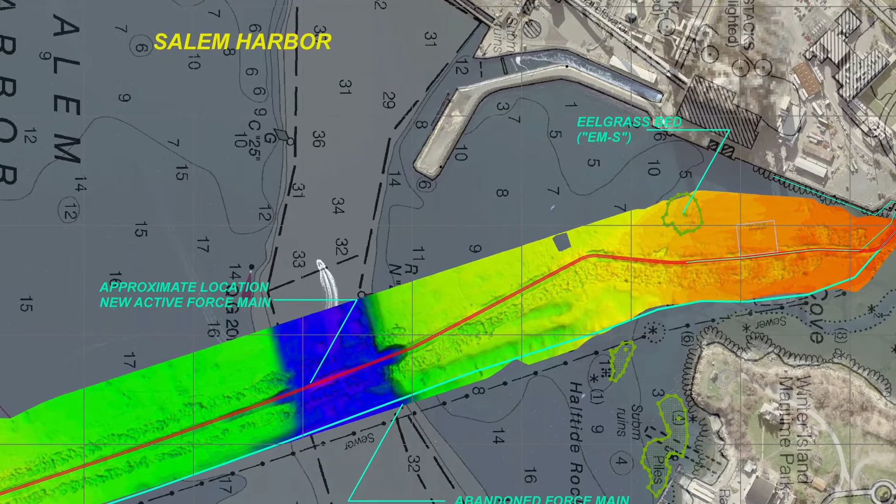Multi-beam sonar surveys of the harbor bottom were performed to verify the backfilling of the trench and the restoration of the harbor bottom profile. A dive survey of sensitive harbor eelgrass beds was performed, which confirmed that these aquatic resource areas were not damaged during construction. Through this project, the South Essex Sewerage District successfully removed a potential environmental hazard and replaced a leaking sewer with a state-of-the-art pipeline.

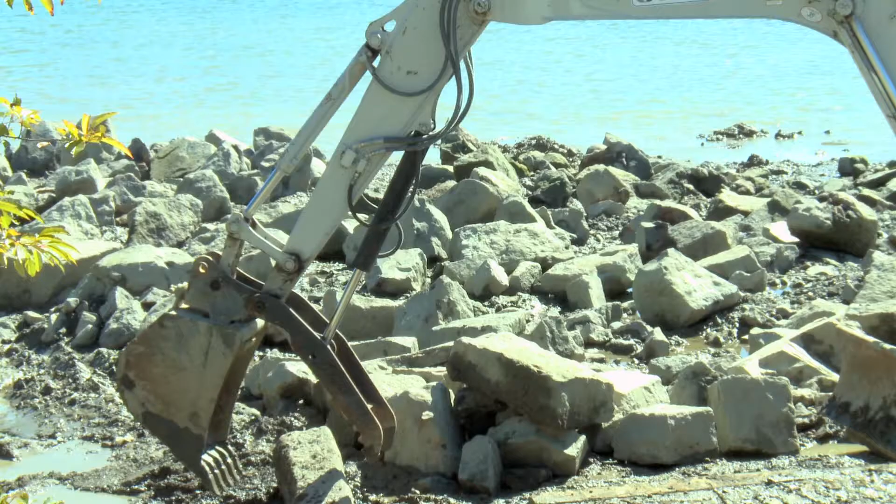Us, the contractor, and Parsons Brinckerhoff, I think everybody did well because it was a quick job too. Especially for Parsons, it was we need to get this thing designed, we need to get it out on the street, and we need to get it done as soon as possible. And then, the time of year to install it. The time of year is just horrible. And it was the worst winter we've had in 30-something years.

I know we did a good job, and I know that the pipe is a good product. HDPE pipe is incredible stuff. It was a success for Marblehead and SESD. It actually went pretty fast. Even with the delays, we got it done pretty quick, considering what is required to install a pipe like this across that harbor.

It requires significant permitting. And to get that all accomplished in 8 months actually was pretty fast for the size and scope of the project, if you forget about the emergency side of it. But we made it. Pipe didn't leak. At the end of the day, we didn't have a catastrophe. I don't think it could have worked out much better than it did, to tell you the truth.